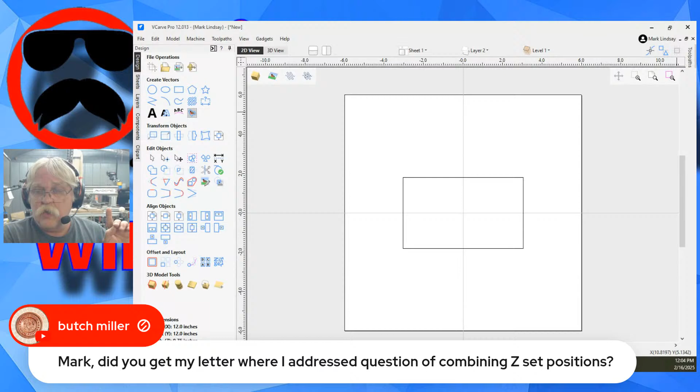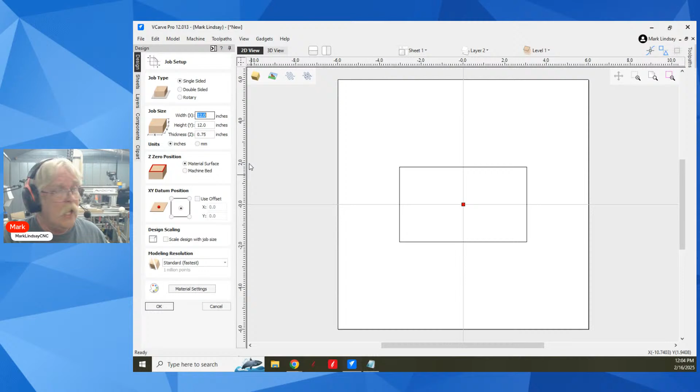Let me bring in vCarve here. It's talking about the ability to combine setting your Z0 to the material surface as well as the machine bed at the same time, and then being able to combine tool paths off to the side over here in the tool paths tab. The short answer, Butch, is no, you can't do that. Yes, I did get your email about it, but no, you can't do that. And the reason is because when you go over here into job setup, it needs to know — you can only select one. You can select material surface or machine bed, and it's going to base all of your tool paths off of that.

Now, as I indicated in my video on the subject about running material surface and machine bed in the same file, what you would have to do — for instance, if I was going to pocket this out based on the material surface, and then I wanted to do a profile toolpath based on the machine bed, I would have to create another sheet the same size as this, and then set the Z0 for that second sheet to the machine bed up here in the job setup.

It can't do both, it's one or the other. That was my determination, yet I thought Vectric might be able to do that. No, because it calculates everything from the Z0 position you set. You're not able to pick and choose where you want each tool path to run from. Now, I don't know if that's something they're even considering. I don't know if any other software like Fusion, or Rhino, or RhinoCam, or any of those other packages let you determine that for each tool path, but it's not something I've ever seen requested as far as Vectric is concerned.

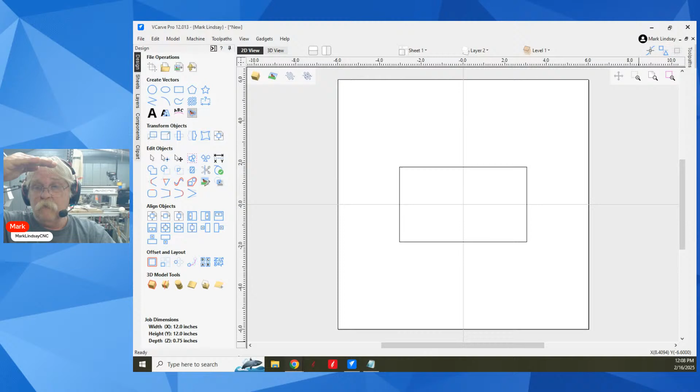Yes, it's just that Vectric can't keep track of it. And I think it's more than Vectric, because for instance, is your controller capable of handling something like that? And I got to also add, Butch's context was he likes to create one G code file and then does manual tool changes. His controller knows when to do a manual tool change, shuts off the spindle, moves to a park position, stops and waits for him to make that tool change, hits cycle start again, then it'll continue.

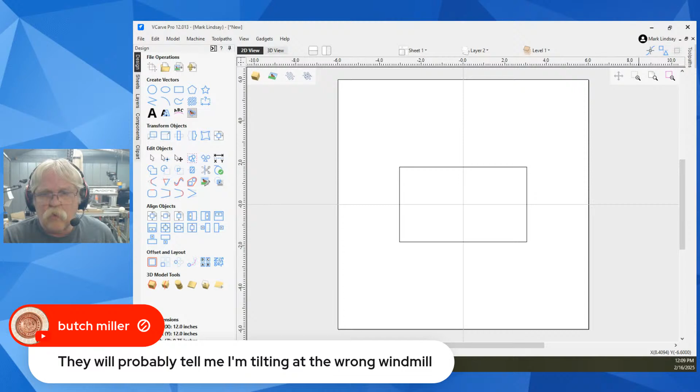Well, if you have set your XYZ in your controller, will it recognize that change from material surface down to machine bed? I think you may be introducing more problems than you'd be solving, just for the ability to avoid loading another piece of G code, setting Z0, and running it. They will probably tell me I'm tilting at the wrong windmill. You may be, because it's a question of A, can the design CAD CAM software do it, and B, can your controller do it? Will it recognize that shift, or will you have to stop and re-zero anyway?

Probably have to stop and re-zero anyway, unless you're using an automatic tool changer that already knows your machine bed position from the top of the Z height travel. But then again, I think just because you want to avoid loading a separate piece of G code and resetting Z0, I don't know. I don't know if there are other CAD CAM packages that'll let you do it, and I don't know if your controller will handle it. So there's a lot of stuff there.

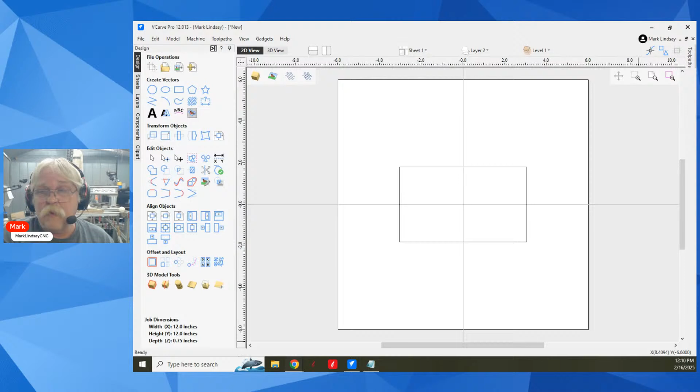Let's see, was thinking a Z0 message to remind. Yeah, that's definitely a possibility. But then you're getting into playing with the controller, which is outside the scope of anything I do, because I know some Mach 3, I know a little bit more Mach 4, but I'm not using either one of those anymore. I'm on to Centroid Acorn, which is a whole nother critter. A whole nother critter, so sorry about that.

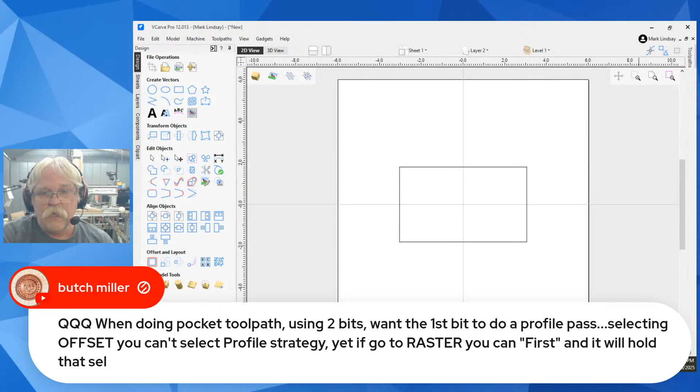Let's get into some of the others. That's another question by Butch Miller. When doing a pocket toolpath using 2 bits, I want the first bit to do a profile pass. Selecting offset, you can't select profile strategy, yet if you go to raster, you can select it first, and it will hold that selection, then switch back to offset.

Okay, so is your question about it switching back to offset? That is the default in a pocket toolpath, that is the default. If you're asking why it won't do a profile, I'll just show you over here. Got this closed vector, and we'll go over here and we'll do a pocket. And I'm going to get rid of that ball nose. 0.5 is fine for a depth.

I'm going to get rid of that ball nose, and let's go with a 1/8 inch end mill there, and we'll select it. So my roughing is going to be 1/2 inch, my finishing is going to be the 1/8 inch. And what you're selecting when you're selecting your toolpath strategy is you're selecting for the roughing bit. Now, as you can see, mine is set to raster with a profile of last. You want yours to do a profile first. Okay, that's fine.

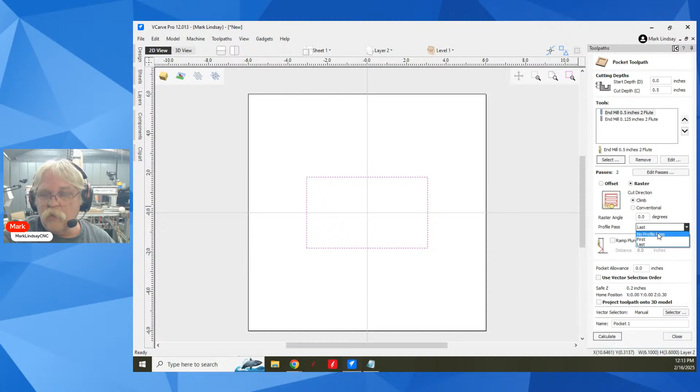Let's change that back to first. We're going to cut conventional, and we'll go ahead and calculate it. Now I'm going to uncheck both of them here.

Because I set it to raster, you can see it's not going all the way over to the vector. It's coming close, then moving over, then going back, back and forth like so. Then it will do a profile and come along and clean that up.

Now we had it set to profile first. It'll do the profile first, then go back and forth. Then we'll shut that off. Then your finishing bit will come in and actually cut up to the vector.

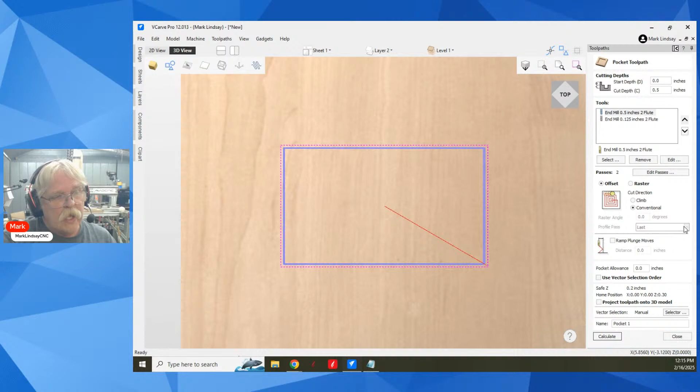Now let's go back in here and change this to offset. The reason you can't select profile pass is because an offset toolpath automatically does a profile pass. An offset toolpath is going to come out to a point somewhere towards the middle and start carving.

Then it moves out and starts carving, comes down, moves out, and just keeps carving like this. When it gets out here, it does its own profile pass.

So it won't let you decide whether you're going to do the profile first or last, because the profile is built into the offset machining strategy. So turn that one off and you can see how far out this is going to go.

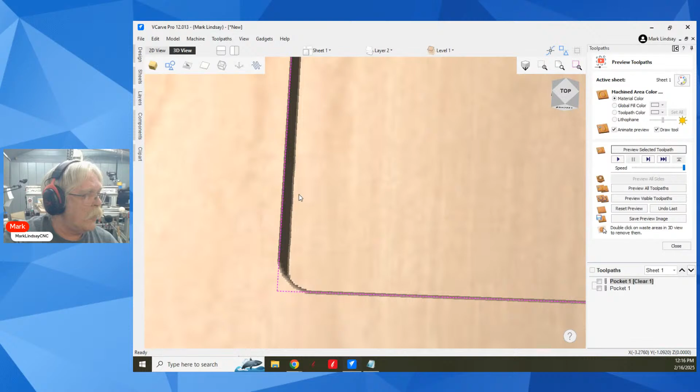Oops, I did the wrong one. Reset preview, there you go. You can see that it's going to come in and cut close to the vector, but not all the way. But with the offset, it does cut all the way up to that vector.

And then your pocket, finishing with your smaller bit, is basically just going to clean up the corners and make sure everything is nice and smooth, getting anything down in these corners that might have been left behind.

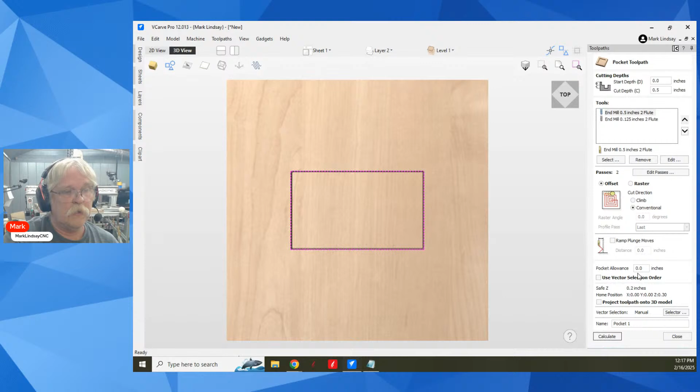So basically, when you're doing raster, it lets you decide when to do a profile pass, if any. But it doesn't let you decide that on the offset, because the profile pass is already programmed to be done with the offset toolpath.

So let's go ahead and close that and reset that preview there. Shoot back over and jump back into the 2D view. So I hope that answers that question.

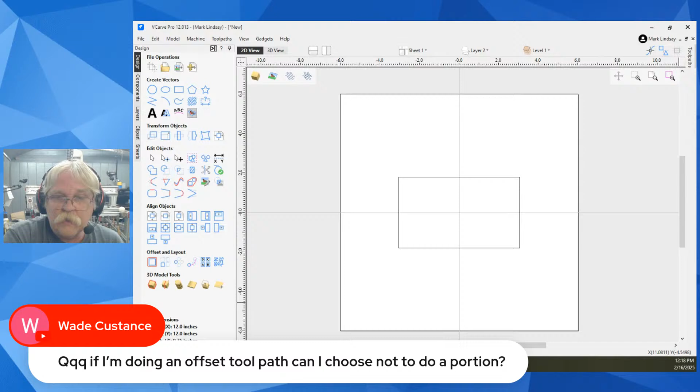Let's see, we have some other questions here. Wade Custance is asking, if I'm doing an offset toolpath, can I choose not to do a portion? I asked for clarification, saying profile, pocket, whatever. He said a profile.

If you're doing an offset on a profile toolpath, for example, we'll take this and close that. We're going to do a profile and offset this, going outside to the right, and we're going to offset this by 10 thousandths.

It is going to offset that entire toolpath. It's not going to allow you to pick and choose which part you want to offset.

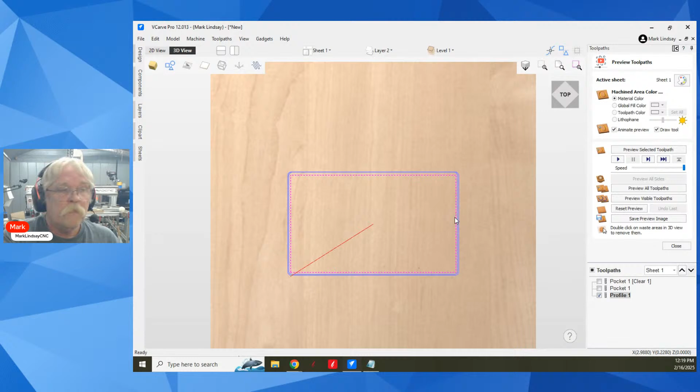The better way to handle that, let's shut that vector off and uncheck that. The better way would be over on the design side, where you would offset this vector, decide which portion you didn't want offset, then use node editing to go in and edit that offset vector.

This may include going over and starting another layer. For instance, I'm going to offset this outward 10 thousandths. Let's do that, 0.01.

Create sharp offset corners. We'll offset that, and I have offset that out 10 thousandths.

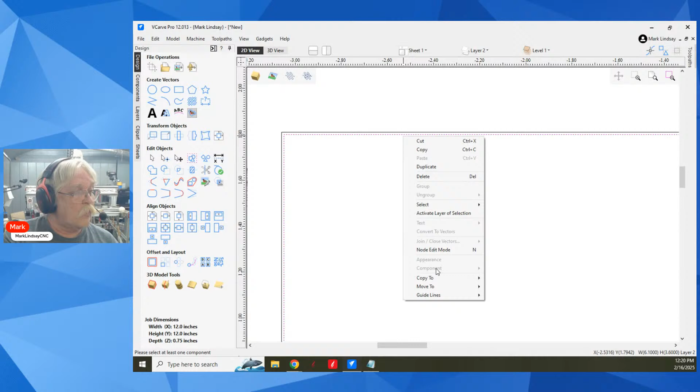We'll right click it and move it to layer 3. Now I'm going to select my original vector and move it, or copy it, to layer 3. Now I'm going to make layer 3 my active layer, shut the others off so that I have both of these here.

Now, for example, if I want to offset these 3 sides but not the bottom, what I'd need to do is come down here, go into node editing, and insert a point level with this. Well, let me just cut the vector there.

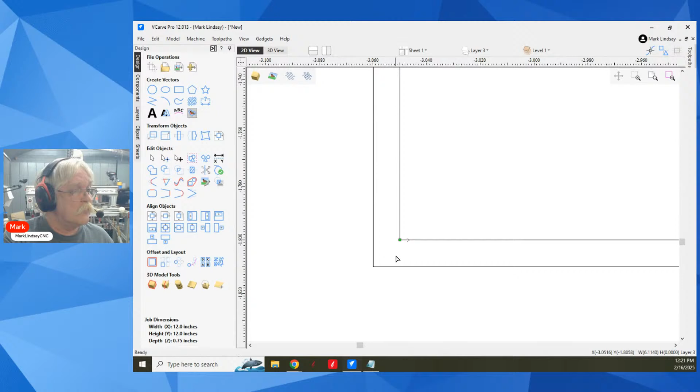Right click, cut vector. Come over here, right click, cut vector. Then I'm going to grab that point, drag it outside. Jump over here, do the same thing. Grab this point, drag it straight out.

Then I can come out of node editing, take my scissors, trim that away, trim this away, trim that away. Then I'll need to go back over here, make sure I don't have anything overhanging, trim that away.

And now what I have, let me turn layer 2 back on. Now what I have is basically an offset outwards over here, here, and here, but not there.

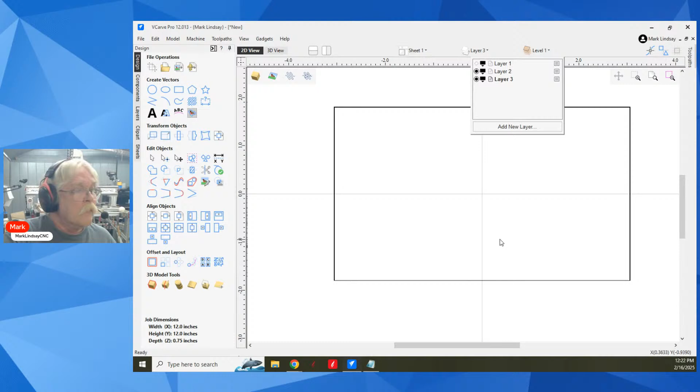This is also how you would join vectors that are giving you a problem. So basically you're doing all the offsetting out here on the CAD side rather than the CAM side. So turn off layer 2, and there we go.

Could you put a vector over the original, the part you want to offset on, and cut that, then cut the original vector? Yeah, you sure could do that, but that's not what I understood he wanted. What I understood was he only wanted to cut offset on certain portions of a vector. So okay, that works, Wade.

All right, cool, great. Okay.

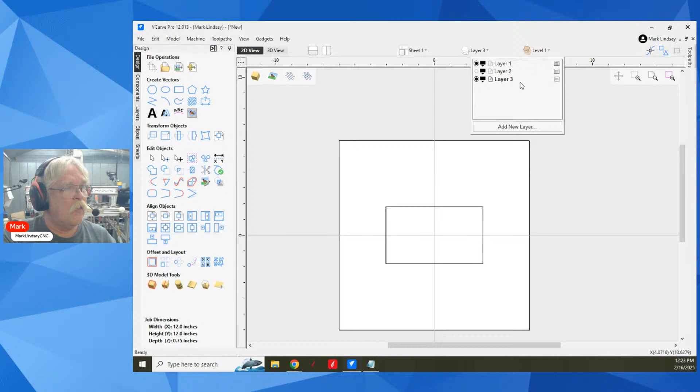Okay, we have some unfinished business that's also going to dovetail in with a question we got today. To do this, I'm going to turn on layer 1 and make it active, then turn off layer 3.

Last week, Madra 3112, or 3212 excuse me, asked about on an open vector. She wanted the bit to, say for instance, start here, make the cut on a profile, then lift up and come back over here, cut and make the profile cut, lift up and come back. She didn't want it to start here, plunge in, cut, then plunge in and cut and go back this way, and then plunge in and cut and go back that way.

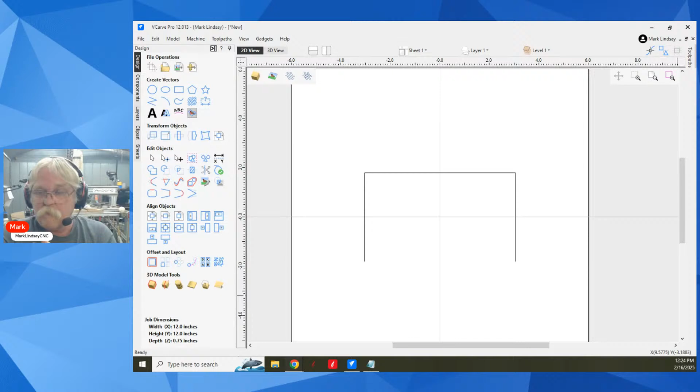So we got into it and showed it on the members only side last week. There were some folks here who wanted to know, well, show us too next week. And I said, okay, fine, I'll show it this week. What you have is a couple of things to consider.

Now, what Ellen was doing was she was select the vector, obviously come over to the toolpath side. We'll close this, and I'm going to go ahead and delete all of these. So we'll delete all visible and got rid of those toolpaths that I no longer need. Okay, so we'll come over here, we'll select this, and we're going to do a profile toolpath.

We're going to cut all the way through the material, but let's see, I'll use the 1/4 inch, and I want to make more passes just so you can see what's going on. So we'll do that. I've now got 6 passes, set passes, and click OK. So now I'm doing this in 6 passes.

Okay, now here's the trick. She was attempting to cut on the vector. And when you cut on the vector, I'm not going to do anything else out here at all. And I'll calculate that.

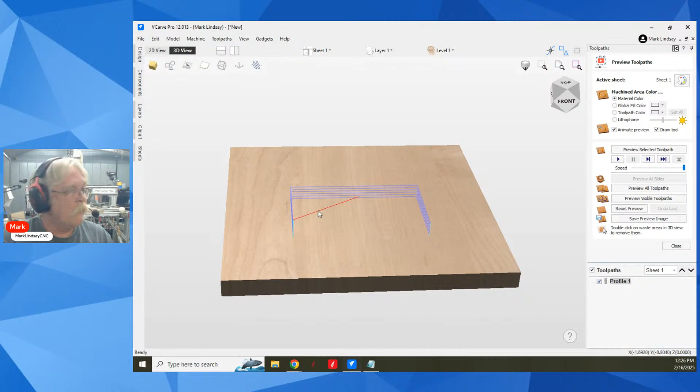When you cut on the vector, it's going to go back and forth. It's going to cut around like this, then plunge down and come back around like this. Okay, now if you look, what we have here, it's going to come over from our XY0, and light blue is plunges, green is retracts.

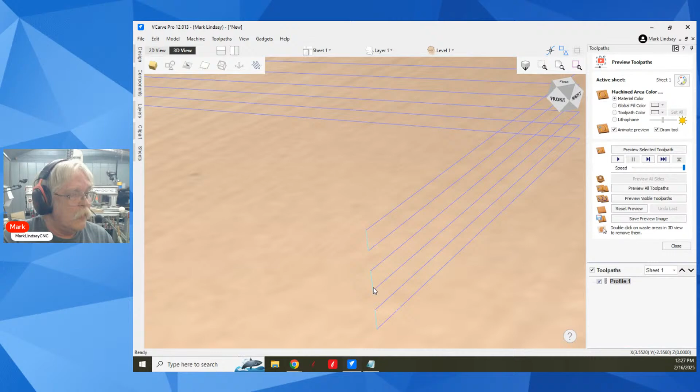It's going to plunge down, make the first cut, come around over here, zoom out, zoom back in, and then there's our light blue plunges. It's going to plunge down to the next level and go back around that way. And then do the same thing over there. Plunge down, then come back around this way to here. Then plunge down and do that. That's if you're calculating that profile toolpath to cut on the vector.

Now, if I go back over here and I say cut to the outside of the vector, and I come down and I calculate, it's going to do the exact same thing.

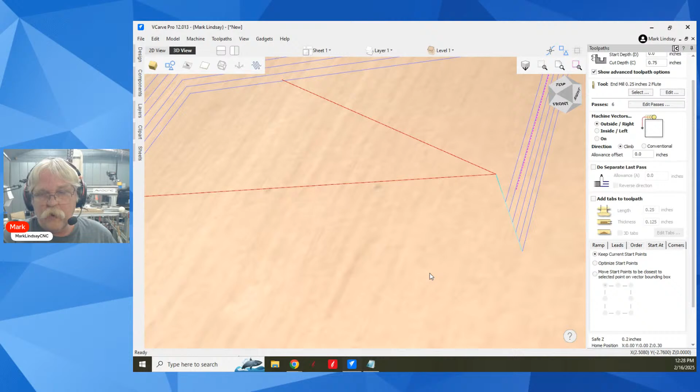Now, what I need to do is go over to Start At and make sure I have the radio knob selected in Keep Current Start Points. Usually it's set to optimize start points. We don't want to optimize the start points, we want keep current start points. What that's going to do is make it use the vector start point, and that's where the plunges are going to be. Now there's another aspect of this that I'll show you in just a second.

Close this, we'll go back to the top here. I'll go back to my preview, and I'm going to slow it way down so you can see what the bit is actually doing. We'll zoom in, now we'll preview. We can see it plunged in over here, and it's going to lift up and come back and plunge over here, then lift up, come back, plunge over here. So it's doing what we wanted.

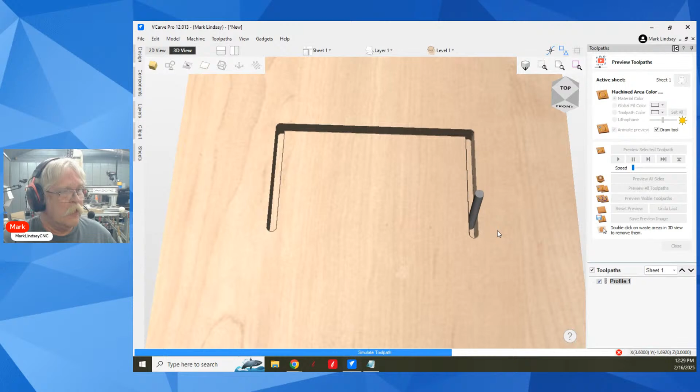However, look at the direction that it's going. It's starting over here. Let me go ahead and stop this. If I come back over to my 2D view, there's my start point, but it's starting over here. Why is that? And we can confirm that it's the start point - the vector selected, we'll go into node editing, and there's my green start point, but it's starting over here and going this way. Why is that?

Well, if we go back in, we're machining the vectors from the outside, or right, of the vector.

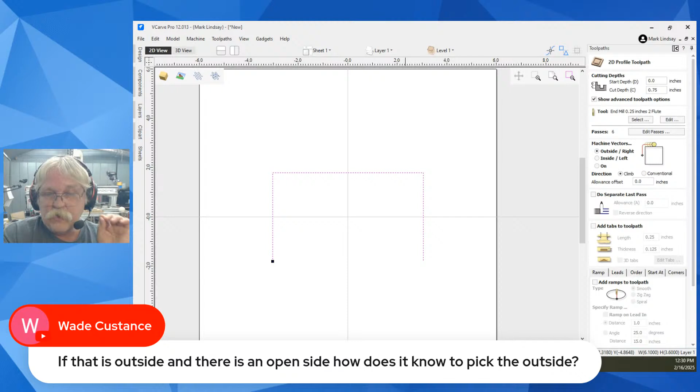Now, the way it was explained to me, the easiest way I've seen it explained when you're wondering about this stuff - this also dovetails in with doing a pocket with an offset. And Wade, that's exactly what I'm getting to right now. If that is outside and there's an open side, how does it know to pick the outside?

It doesn't. That's why you have to pay attention here. Outside, right. Here's the way it was explained to me: imagine standing on that start point.

We go back into node editing for a second. Oops, I got to close this so I can go into node editing. Close. If I select the vector, we go into node editing. There's my start point - look at the direction that arrow is pointing right there, it's going this way, okay? Come out of node editing, go back into the toolpath.

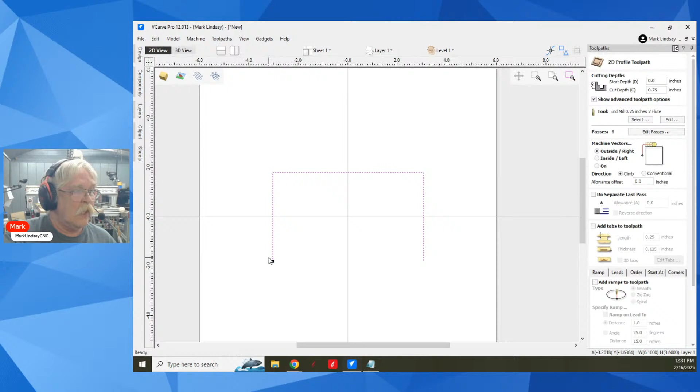Outside, right - so imagine standing on that start point, it's going to cut to the right of the vector. Okay? If I go inside left, it's going to cut to this side of that vector. It's based on the direction of the start.

However, just to complicate stuff, it also looks at direction. This is set for climb cutting. This is why this is the start point, but it started over here. So if I change this over to conventional and I calculate, now it's plunging over here. Let me reset my preview, zoom in, way down on my speed. Now it plunges in over here at the start point where we wanted it to go.

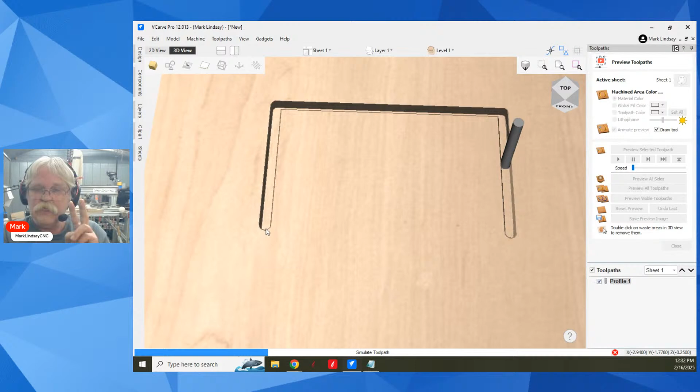So there's two things to pay attention to right there - or three things actually. Where your start point is, your machining strategy, and your machining direction, climb or conventional. Okay? So that's three things to pay attention to.

Now, just to complicate matters a little bit further, what Ellen was wanting was she was wanting to cut on the vector. Well, if you cut on the vector, again, it's going to plunge down here, go around for the first pass, plunge down over here, then come back around for the next pass. The software won't allow you to do that. It's not going to lift up and come back over and plunge down when you're carving on the vector.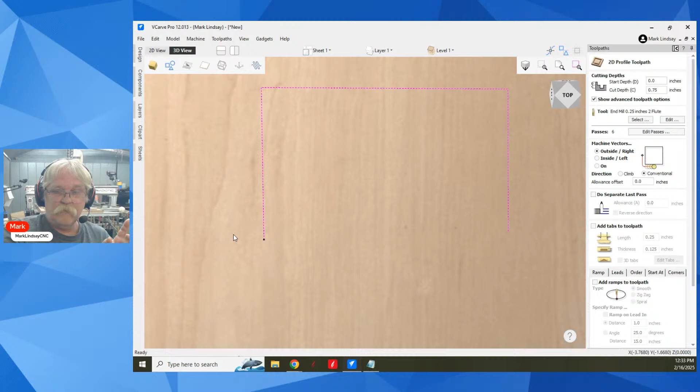So now what you have to do is you have to decide, am I going to cut this outside to the right, or am I going to cut this inside to the left? We're going to cut outside to the right, so I want the bit to cut inside the vector.

So what I'm going to have to do now is go back over to the CAM side, or CAD side, and I'm going to have to offset this out. So I'm going to offset it inwards left - this is confusing. I'm going to offset it inwards to the left. I want this out here.

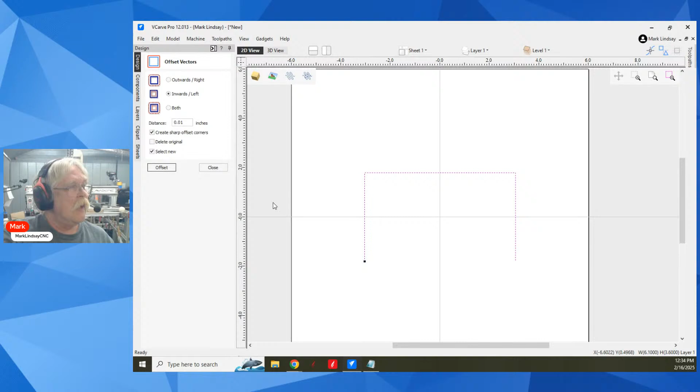Again, standing on the point, looking in the direction the vector was drawn, I want it to go out to the left. And I'm going to offset it out the radius of the bit that I'm using to cut. So if I'm using a 1/4 inch end mill, the radius of that 1/4 inch diameter is 1/8 of an inch, 0.125. Create sharp corners, select new, offset. So there is my offset vector. Okay.

Now I'm going to select that. I'm going to select outside right. Again, confusing as heck. That's going to come over and put the center of that bit right along this vector.

Okay, then make sure I've got my direction correct. Make sure I've got keep current start points. Then I'll calculate that toolpath. Go straight down from the top.

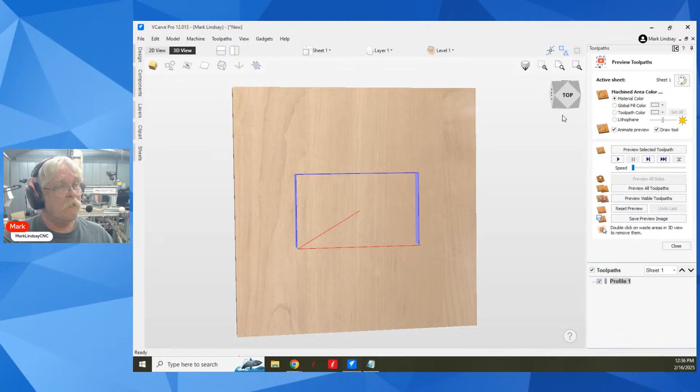Straight down from the top. And I'll preview it. Now it's going to cut in the right direction. It's going to lift and then plunge over here. Let me speed it up to get through these 6 passes.

It's confusing, but it works. Now I really don't know why it is the way it is. I really don't know why if you select on the vector, it won't lift up, come over, and plunge. I don't know why that is. I'll reach out to a few folks and see if they can give me an explanation as to why that happens. So,

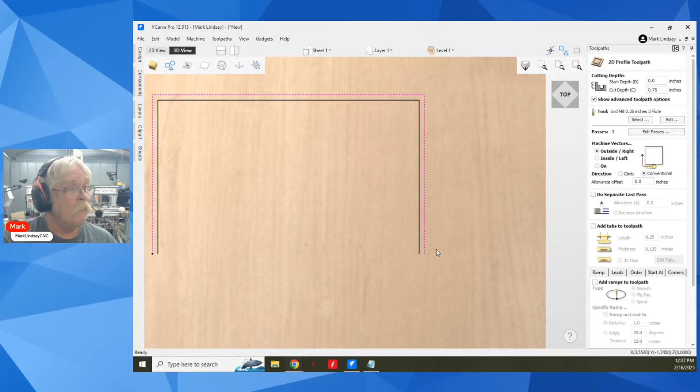Wade says, so you change your start point if needed to get the direction of cut you want. That's the first place to start. Yes, you make sure your start point is where you want that to start. Then you need to make sure you're machining to the proper side. Then you need to keep current start points. Okay.

So, but isn't Vectric going to complain that you have an open vector? No, because a profile can cut open vectors. The only toolpaths that need closed vectors are pockets, drilling, and V-carving. Those are the only toolpaths that absolutely need closed vectors.

Profiles don't need closed vectors. Photo V-carve doesn't need closed vectors. Sketch carve doesn't need closed vectors. Wait, I take that back, V inlay does need closed vectors. Fluting doesn't need closed vectors. Yeah, I don't think the rest. The 3D needs closed vectors if you're machining to a vector. So,

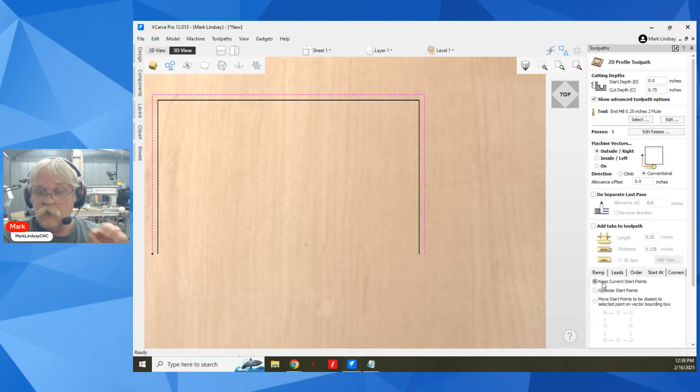Pete says, so the optimized start point selection would not be a factor in this exercise. It's not desirable in this exercise because you want it to use that start point, you want it to keep using that start point. So that's not desirable. The optimized start points is used, if you've got several vectors out here, to shorten the amount of time the bit's going to be up out of the material so that it's cutting rather than making rapid moves.

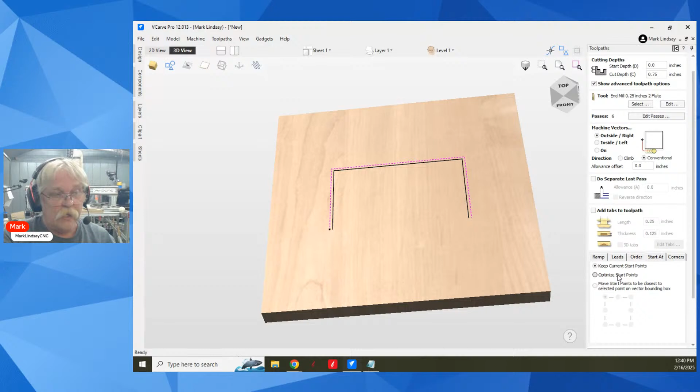Well, in this situation, you want it to cut a certain direction and you don't mind those extra rapid moves, because in this situation, the bit is taking 6 passes. It's going to make 6 rapid moves back over here to cut in this direction. Okay. So the optimize will keep it from doing that. It'll try to keep the bit down cutting in the material as long as it possibly can, or as much as it possibly can, just to optimize it so you're not spending a lot of time.

So I like to control where my bit starts, so usually I set my start point. Yeah, I do too, I do too. For instance, if I'm using a XY0 position over here on the bottom left corner, I will try to make my start points over close to the bottom left corner, because to me it doesn't make much sense to set to the middle and then have it come out here, or set over here and have it come over and start over there. If I'm going to do that, why not set my XY0 over here?

Because remember, you don't have to set your XY0 to the bottom left corner. You can set it to any of the four corners or the center. So

I was just getting to you, Ed. I was just getting to you.

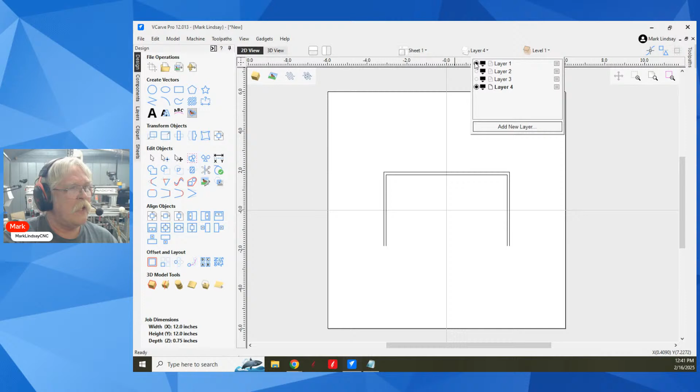Okay, let me do a little bit of reorganizing here. We'll get back over here, zoom out. Excuse me. And I'm going to start, I'll add a new layer here, call it layer 4, that's fine. I'm going to make it active. I'm going to turn off layer 1.

Now Ed was asking, when surfacing using a 1.5-inch bit at 40% using a pocket raster, I can set a depth of 1/4 of an inch and take multiple shallow passes using my Shapeoko 4 with a spindle. When I cut in one direction and it goes back in the opposite direction, I get a ridge. When I set up multiple passes with open vectors cutting in one direction, let's say right to left, and lift up and cut another pass from right to left again, I get a smoother finish. My question is, how can I set my depth to 0.25 inches, taking shallow passes using open vector format?

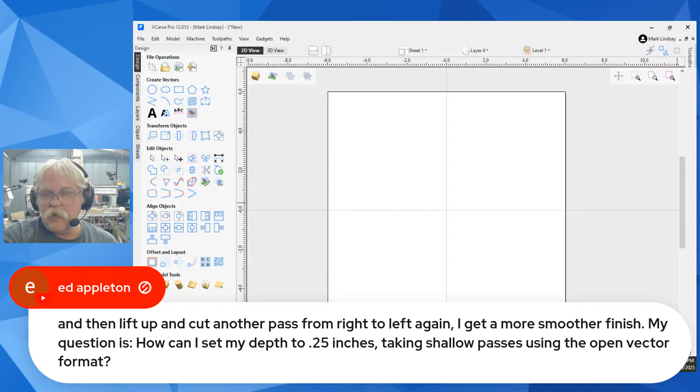That dovetails in perfectly with what I'm showing right now. Okay.

Basically, what you're looking at is, you set a 1.5-inch bit with 40% step over, so that would be 0.6, right? So what I'm going to do is set up a pocket toolpath for this. Now, when you're doing this the way you want to do it, you wouldn't use a pocket. You would use profiles.

So what I want to do, I want my bit, and I'm going to go right to left, as you stated. My bit is 2 inches in diameter, yours is 1.5 inches, I'll just do it for yours. We want all of our X moves to be off of the material, and we know that. So what we'll do is come out here by about 2 inches. But for right this moment, I'm going to just go ahead and make a vector that's the same length as the material.

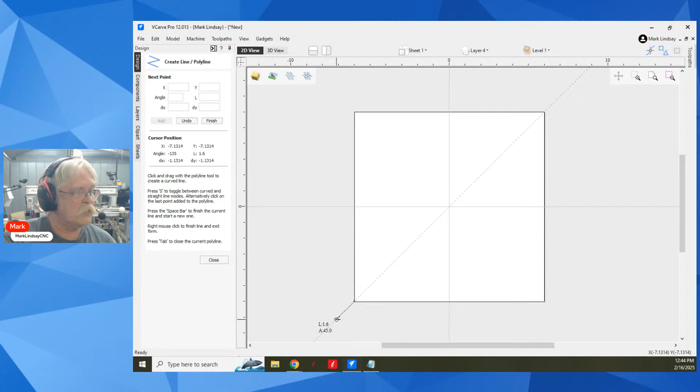Now, because you're going from, you want it to cut from here to there, you still want the bit to come off so you don't end up with a round edge here and you don't have plunge moves happening on your material. So I'm going to take this and move it out another 2 inches. Boom. Well, I moved it, I didn't extend it. That's okay, I'm just looking at my scale up above.

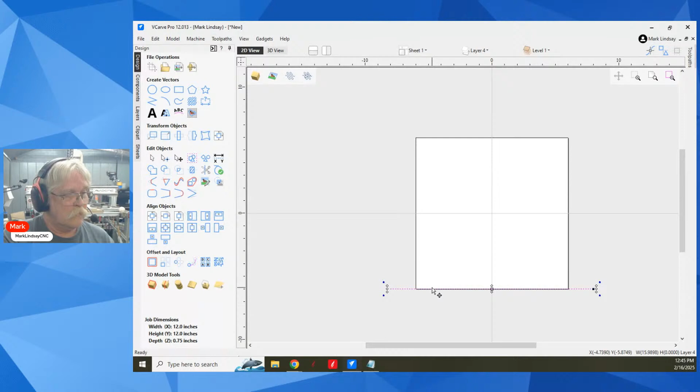What I've done is I've just stretched this out. So I'm looking at my scale up above here. I'm at 6 and I just drug it out until it's equal with 8.

Now I'll select that, and I want to copy these up this direction. So I'll do an array copy, make a linear array. I want one column in X, and boom, I want rows in Y.

0.6, I think we want 10, should get me to 6 inches roughly. Let's look at 12 and see what that does. They said there'd be no math.

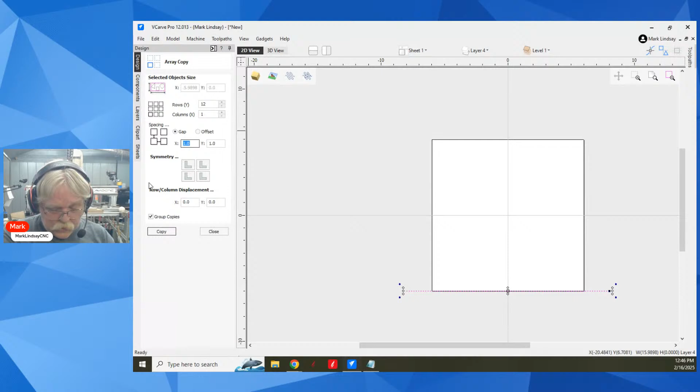I want a gap in X. I don't want any gap. I want a gap of 0.6 in Y. Okay, don't want to group them just yet. Let's copy, let's see what we get.

That's not enough, control Z. Let's go for 20. Whoops, go for 20. Copy. Let's go for 21, control Z. Because what I want... there we go.

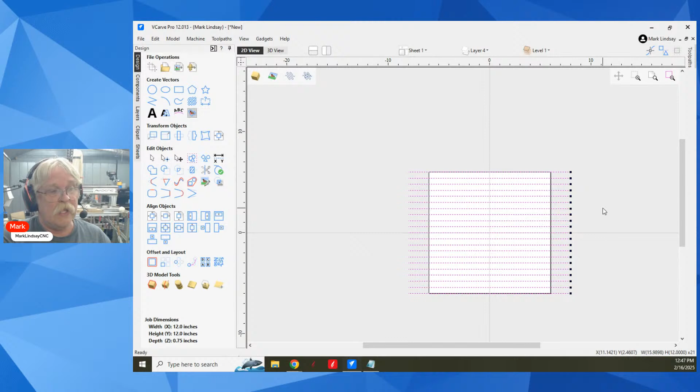What I want is a vector right here on this top edge, and a vector down here at this bottom edge. So now I have all of these open vectors. Notice my start points are all on the right. I can verify this by tapping N to go into node editing. All of my vectors start on this edge.

Come out of node editing, zip over here, and we're not going to do a pocket toolpath, we're going to do a profile toolpath. Now you want to come down a quarter of an inch, 0.25, but you want to make shallow passes.

Now, just because it's me and I don't have a 1.5 inch surfacing bit in my tool catalog here, my tool database, I'll use my 2-inch surfacing bit. Boom, and select.

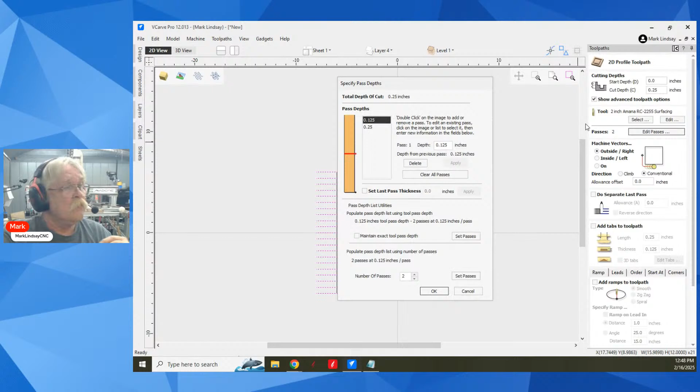And I'm going to come down here and edit the passes. Now you said you wanted it to take off shallow passes, but you didn't say how shallow, how much. But what we can do is come down here and set the number of passes. We're going to be taking a quarter inch of material off. I'm just going to click the up arrow here. We're going to be taking off about 62 thousandths, 0.0625, so a 1/16 of an inch per pass.

If that's okay, we'll click set passes. If not, we'll do a little bit more. 6 passes, we'll click on set passes. Then we'll click OK. Now it's going to take 6 passes.

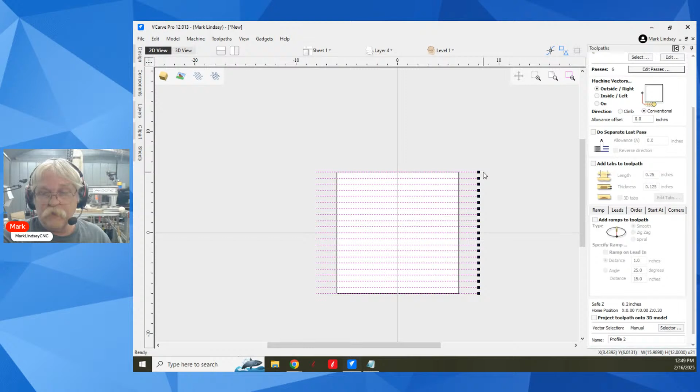I'm not going to do a separate last pass. I'm not going to add tabs. I'm not going to ramp or add any leads or anything. All of the plunges will take place over here off of the material, so when it moves and gets onto the material, it's already at the proper depth and it's already up to speed. So now we'll click calculate.

Yes, they will cut as individual contours, not as a single contour. Continue creating the tool path. Yes, okay.

Now that's kind of busy, but that's going to give you the finish that you want. Now, why is that offset up this direction? Did I have an offset in there?

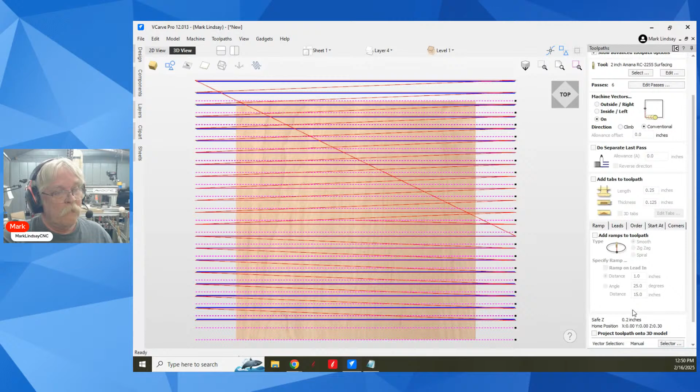Oh, that's because I want it on the vector. That's what I forgot, I'm sorry. I want it to cut to machine on the vector. So, and boom, there we go.

Now that's giving me what I want. And that we're on profile 2. I'm going to slow down the bit again so we can see what it's going to do. And we'll preview. And it's going to do that, because again, we're going on the vector. So it's going to cut your 1/4 of an inch, then move over to the next side.

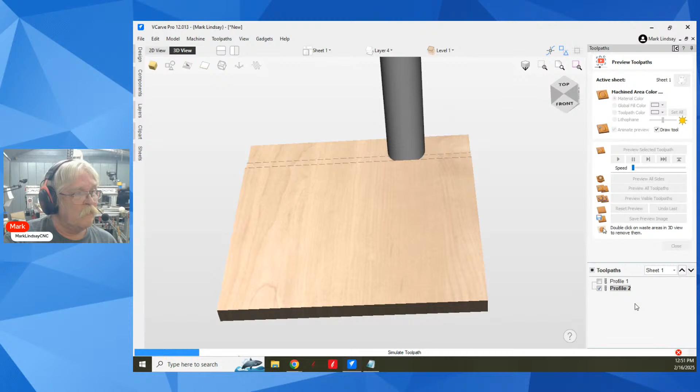You may not want it to do it this way. But no, that's not what you want it to do because it's carving on the vector. Yeesh, man, we get back into that situation. Stop. Reset preview. How should I do this?

There's a couple ways I can do this. Outside right, that's going to shift everything over, though. No, that should do it, okay. Yeah, okay. Let's see how this works.

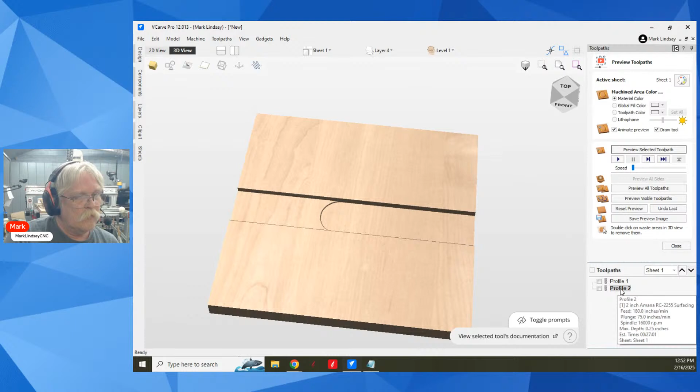Now why is it going for the center? This makes no sense. Oh, wait a minute. Wait a minute, stop. Reset, let's go back over here. Start at, keep current start points. No, that's right.

Let me try optimize and see what this does. See, Laney Shaughnessy does his this way, and I can't remember how he does it. That's not it. Current start points.

Yeah, they must be joined to do these as one contour. No, I don't want to do it that way. I'm going to have to refer you to Laney Shaughnessy, simply because he does his this way, where he makes a bunch of different vectors.

He might just move these around. Andy, I haven't gotten into that yet. Can you just edit the tool and set the pass depth?

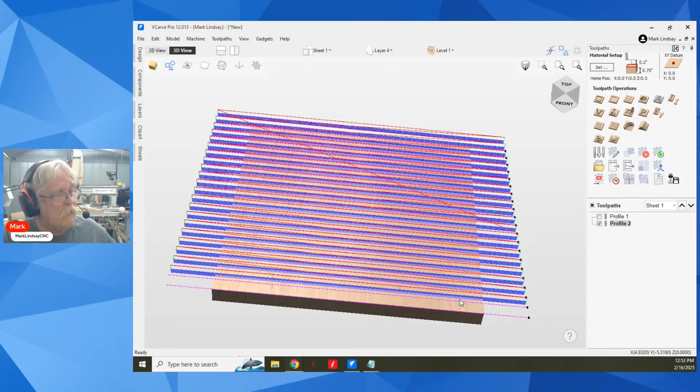Pete, yes, you certainly can. You could get in and set the pass depth if you wanted, but if you're only doing it for one tool path, why? It doesn't make sense to go back in and redo pass depths. It's going to give you the same result.

God, there's a step I'm missing that I don't remember. Laney Shaughnessy over at Spindle TV does his surfacing this way. I don't necessarily agree with it, personally.

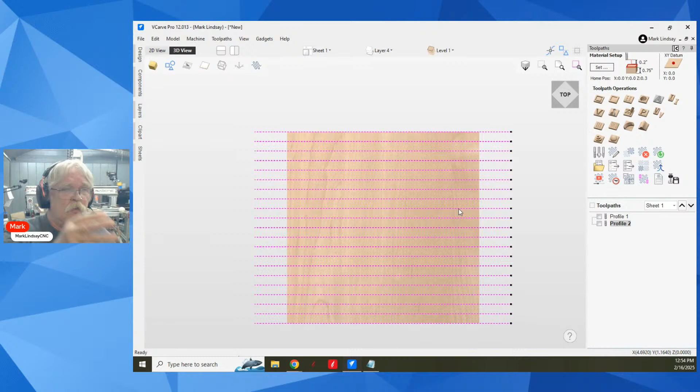Laney's claim is when he does it with a pocket like I do, he gets burning on his material. And my attitude is that's the problem. The burning doesn't have anything to do with the pocket. If you're getting burning, either your spindle RPM is too high, your feed rate is too low, or a combination of the two.

And I think you may be right, you may have to select the vectors in the order you want them to cut. I think you may be right. So let's do this. 7, 8, 9, 11. But then you have 20 selections to do, 21 selections to do, but that's okay, not a big deal.

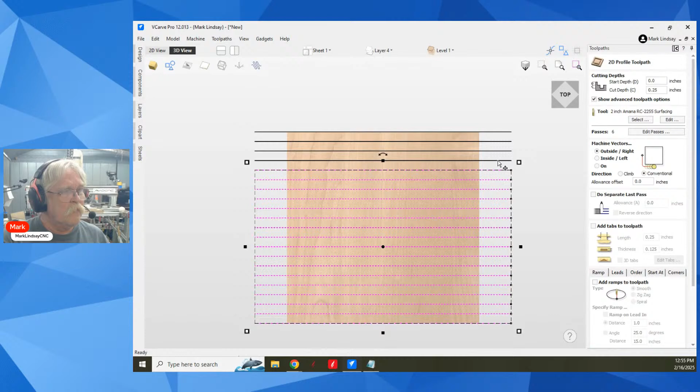Not a big deal. That'll take care of where it starts and your vector selection order. Let's try that, see what we get going.

Further info, just edit the tool for that specific tool path. Yeah, I don't like to do that. You can get in here, click edit. I wouldn't do it in the select button, but you can get over here and change your pass depth to, let's say it is, well right now we've got 1/8 of an inch.

Let me cancel this and let me go back into edit passes. And we're going to, where is reset? We'll take it back down to, I think it was going to do it in 2. Set passes. Okay, now if I, with this bit selected, if I go in and edit and change my pass depth to 0.03125, for example, I put that second decimal place there.

All right, click OK. Look at what that did to my passes, it's going to take it all off in one pass. Cancel, let's go back in here. Oh, it's because I didn't add a 0. Duh, hello, there we go.

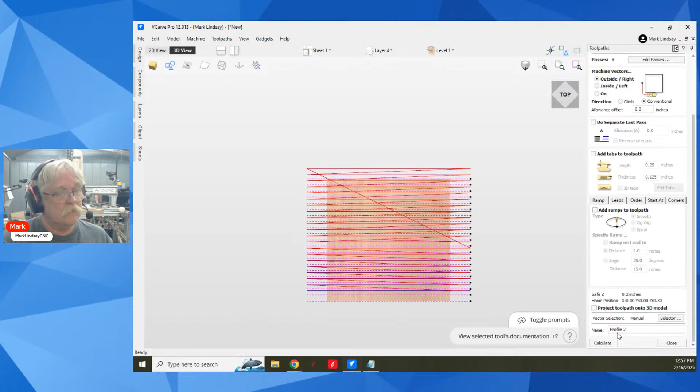Now it's going to take 8 passes. And now let's see, did that have any change? But I still think what it's going to do is do one stripe and then move on to the next stripe. So we'll preview it, and sure enough, that didn't matter. It is doing them one at a time.

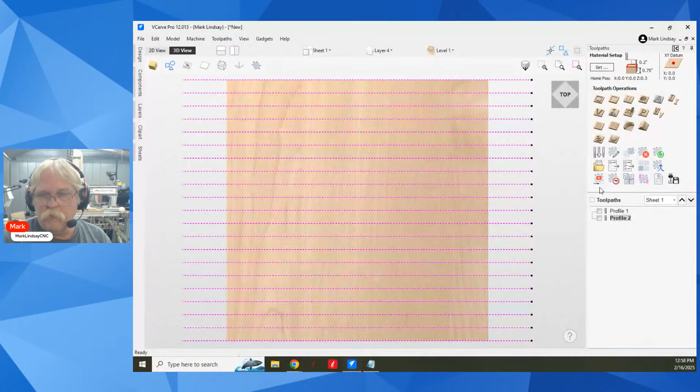Personally, I don't use that. I don't surface using this method. I do a pocket. And, you know, that's just my choice.

Martin says, try setting XY zero to bottom left. Yeah, I could do that. Let's see, that might change it. You may be right, okay, recalculate, okay.

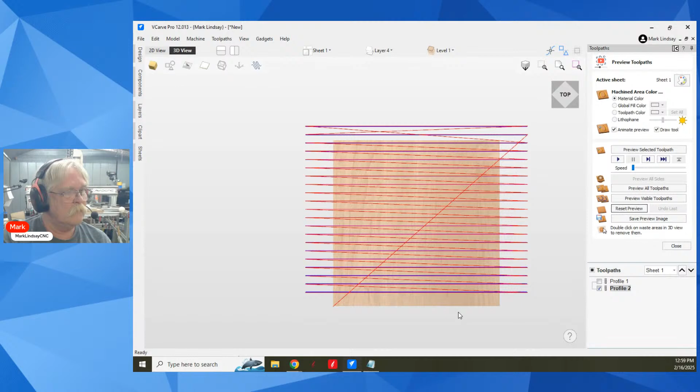Okay, turn that one off. And go back into preview, reset. Let's see what happens.

Yeah, but it's still doing - that did work, Martin, you're right, but it's still doing one all the way down to the depth and then moving over to the next. So that was also an issue for me anyway. So let's stop that, reset the preview. I wanted it to remove, say, a 30 thousandths pass, and then move it again, then have it come and do the whole thing again.

So I will refer you to Laney Shaughnessy. Give me about maybe 15 minutes after I'm done with this, and after we're done live here, I will go find that video and post a link to it down in the description. Let's see, Laney surfacing video. I'll write myself a note right now.

All right, Laney Shaughnessy, he does mainly live streams. In fact, he almost exclusively live streams on his channel, again called Spindle TV. And he's a dynamite teacher, he's a heck of a good guy, a real good guy, and he knows what he's talking about. So, does he do lots of separate tool paths, then output them all at once? No, he does not. I can't remember how he does it because I don't use that method, so I really don't remember.

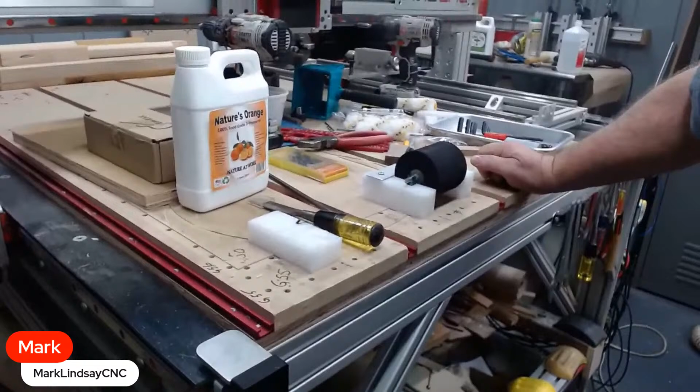Basically, my spoil board is not the size of my machine table, and I can show you that over here by switching over to this camera. You can see that I have a piece of T-track to the outside of my spoil board over here. My machine will actually cut over to about right here - okay, about, well you couldn't see that, camera's way off, there we go - my machine will actually cut to about right there, and about 1.5 inches this side of this edge of my spoil board.

And I did that for a couple of reasons. Number one, I don't need that area. Number two, this machine's cutting capacity is actually 49 inches in X and 49 inches in Y. I don't ever use that. With a rotary axis over there, I don't have 49 inches of X anyway, I have 30 something. Not only that, the way your machine calculates its X width is based on the center of your spindle. You can't see what I'm pointing at.

Yes, you can. So, for instance, when I've got my 2-inch surfacing bit here, the center of that spindle gets over here to the edge of my spoil board. In my case, I'm about 1 inch off of the spoil board over here. So all I need to do is I don't even need to bring this over to the limit of my machine, because it does me no good to have my surfacing bit way over here, since it's off of the spoil board anyway. If I can get the center of my spindle close enough to where it's cutting off the edge of the spoil board, I'm good enough. And that's nowhere near the limit of my machine.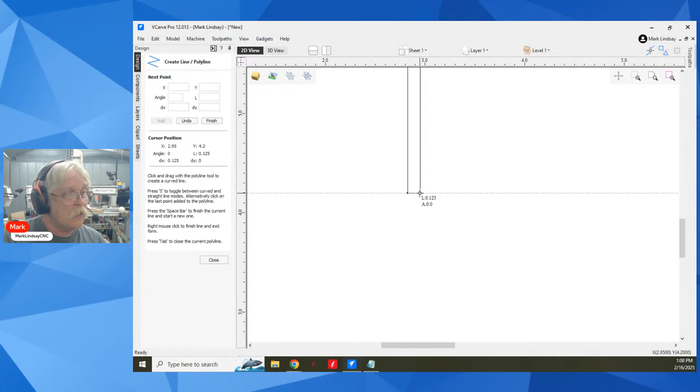If I want to join these to make one closed vector, I've got a couple of ways I can do it. One, I could come over here to draw a line, click, click, space bar, close, then select, come right over here, join open vectors. Right now I have 3 open vectors selected. When I join them, I'll have 1 open vector. Join. I still have this opening here.

Now that's one way of doing it. Here's another way. Select these 2 open vectors. This is 1 open vector, but it's still wide open. I can come over here, join, close with a straight line. So I click on that, and it did all that for me. So now, if I select this, go into join, I have 1 closed vector.

Okay? If you get into a situation, let me try something else here, where we've got this that runs there and runs down here, close. Then you have—let's see, how would I do this—start here, and then come down there, close. When you have something like this, if you want to join this one to this one, you can just use your scissors to trim.

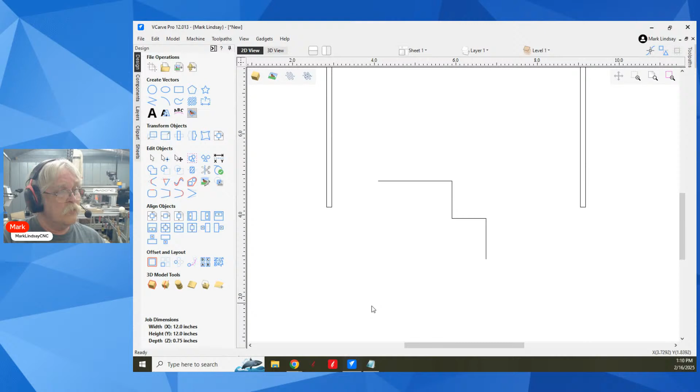And so long as you have a check mark here, you close. This is now one open vector. Now, how do you close this? Same way, close with a straight line. And there you go.

Okay, so now click on that, go to join. We have one closed vector. Again, this is just a few different ways of doing this.

But if you have a situation, let me play with this one here. I'll go into node editing, and right in the middle of this span, I'm going to right click and insert a point. Then I'm going to come back and cut that vector. Okay, so now I'll select this and grab that start point and drag it over here. Now I have a start point here and there's my end point. But you see how long that overlap is.

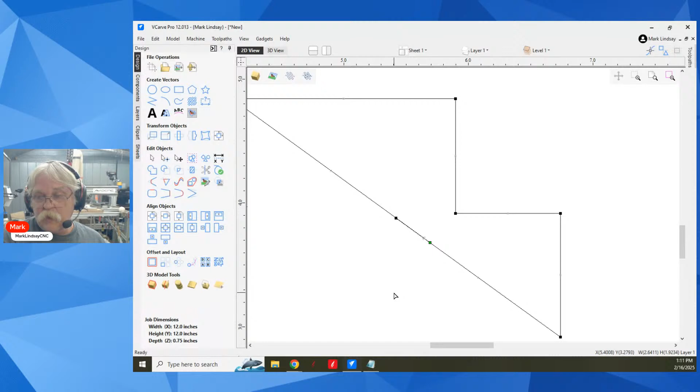Okay, so now I come back and it just looks like a vector to me. Click, select it, go over here, try to join it. I've got one open vector. After joining, I've still got an open vector.

What's going on is our tolerance. This tolerance is 0.0004, so not even half a thou, is way smaller than the difference between this start point and that end point. The start point is way over here, the end point is way over here, and that's much further away than this is. So about the only thing you can do if you don't know where the start and end points are

If you don't know where that end point is, about all you can do is start removing zeros. So I put my cursor right in front of that first zero next to the 4. I hit backspace. Nothing has changed. Backspace. Nothing has changed. Backspace. Now I've got closed. So that tells me the start point and the end point are within that 0.4 of an inch.

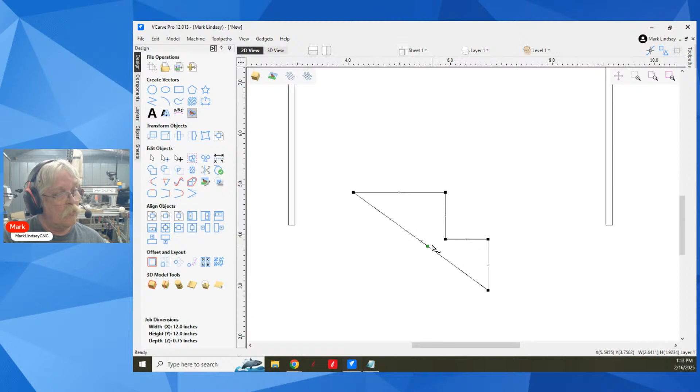Now if I control Z and select it, we can see there's my start point and there's my end point. That's much further than 0.0004. In fact, let's measure and see. Let's measure. Go right there. 0.3407. So that 0.4 puts that difference within tolerance.

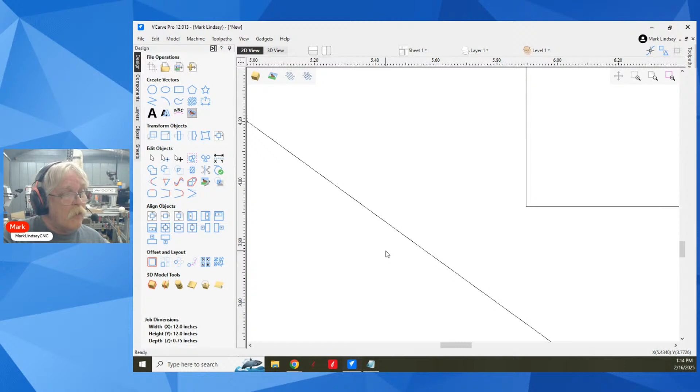So control Y to redo that. And now my vector is joined. Those are some of the ways you can close open vectors. There are a bunch of different ways.

One of the advantages to version 12 of the software is out here in the 2D view, it now shows you this green point here on an open vector, and that lets you know where that start point is. The problem is it doesn't show you where the end point is. So if you have a real complex vector, like something within a flower, and you've got vectors all over the place, you can find the start point, but there's no real way of knowing where that end point is unless you go into node editing.

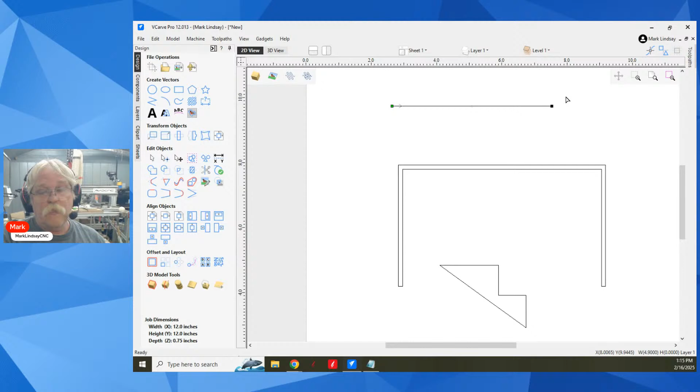You can go into node editing by either coming over here and clicking node editing mode, or just by tapping the letter N on your keyboard, in which case it'll show you that green start point, then it'll show you the end point. It will show you every point in between also. So like if I do this, it's showing me there's my start point, and it's showing me which direction this was drawn in. Here's this point, this point, this point, this point, this point. On a closed vector, the start point and the end point are the same point.

So, that's a little bit of that.

Now let's see, Ellen had another question. I hope that helps you, Tony. I hope that helps you a little bit. Again, I will go in and find some of the better of my videos. I see Steve has already posted one over here in the chat, thank you very much, Steve. I've got several because several things were updated, but they all pretty much follow the same methodology. But there are different improvements. Some things work better than others.

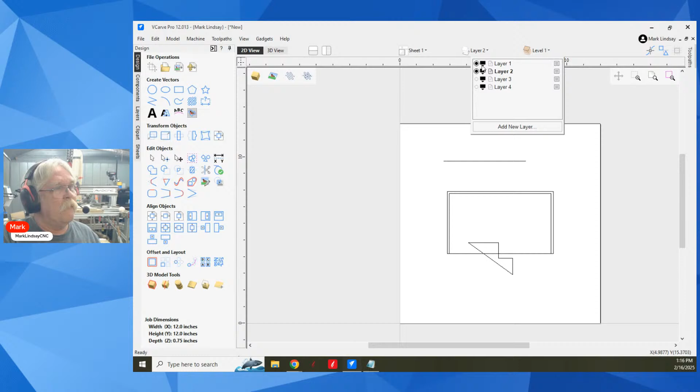To go ahead and wrap up, well, we've got 2 more questions. Ellen has been waiting patiently for me to talk about the pocket toolpath with an offset. Her question was, when you're offsetting a pocket, is it a positive offset to make it cut further in, or is that a negative offset? And does a negative offset make it cut outside of the vector, or is that a positive offset?

Well, let's get into it and let's figure it out. Then I'll show you also, Ellen, a trick that'll help you see for yourself. Well, it's not really a trick, it's a tool that'll help you see for yourself, okay? Let's get rid of, let's delete both of these. Let's just delete all, because I'm going to do a pocket toolpath with this. We'll go in here with a pocket, and I'm going to remove that and just go with the 1/2" end mill just for this. Okay.

Now the pocket allowance, what she's talking about is the pocket allowance right here. Let's say we do a pocket allowance of 0.1, which is huge. If I was going to use a pocket allowance of 0.1, I would just redraw the vector personally, just me. All right, so let's calculate it. And this is a positive pocket allowance. Let's calculate it. Now the trick, Ellen, or the tool, is this.

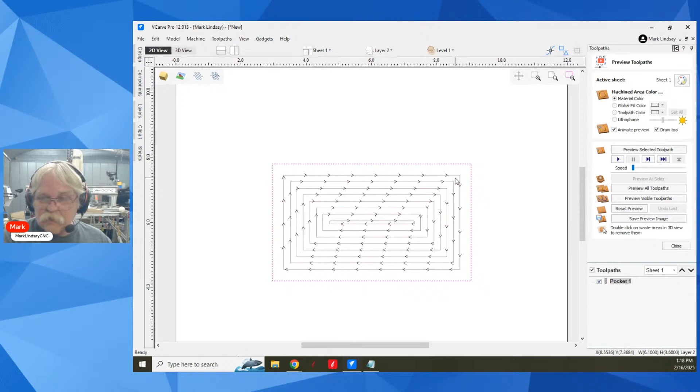Right now, if we come over here to the 2D view, not the 3D view, we want to get into the 2D view. We can look and see where that's going to carve, but that doesn't really help us. Come up over here to this tool right here: toggle the toolpath 2D drawing style. And this is why this is in the 2D view. Click on that, and this gives us a solid view of what is going to get machined out by this toolpath. All we do is make sure we have a check mark over here, and we're looking at a solid view. That's where that toolpath is going to carve. So now we can see a positive pocket allowance makes the toolpath smaller.

Let's go back in here and just add a negative toolpath. We calculate, back over to the 2D view, it makes the pocket wider.

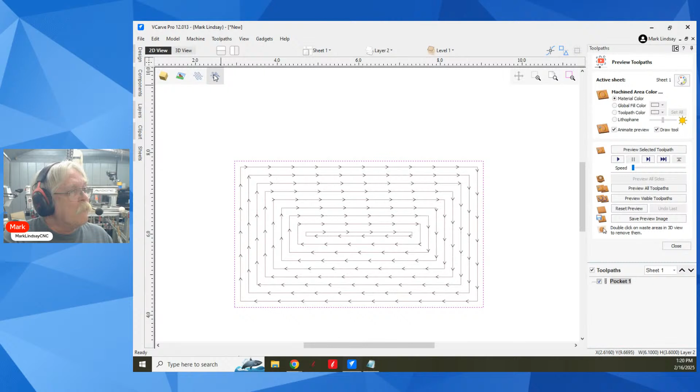Okay, you said you never used the wireframe, never had a need until now. This is solid view, this is wireframe view - this is the default, that's normally what you see. You see the direction, which way, these arrows show which way the bit is going to move. I toggle over to solid view, and that tells you what is going to be cut out by that bit.

If I go back and remove any pocket allowance, 0.0, calculate, go into 2D view, it's going to put it right inside that vector. So negative will make it go wider, positive will make it go smaller.

Why? Again, we've got the vector selected, go into node editing. There's the start point, there's the arrow. To the right, outside right - see? Or did I have that backwards? Outside right, inside left, I believe. So,

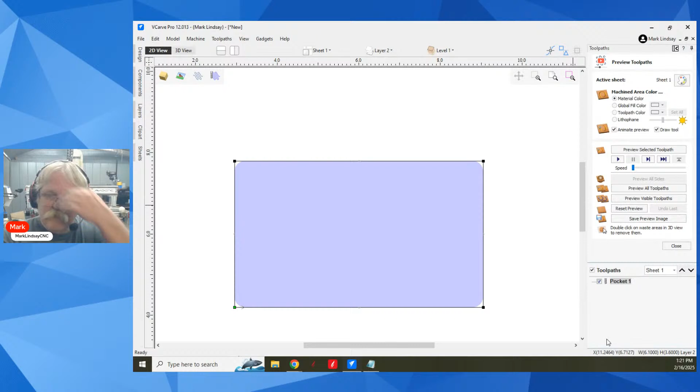Is the rule minus outside the vector and positive inside the vector? Yes. Minus is larger, positive is smaller. It's counterintuitive, I know. But this is why I use this, because I can't keep that straight either.

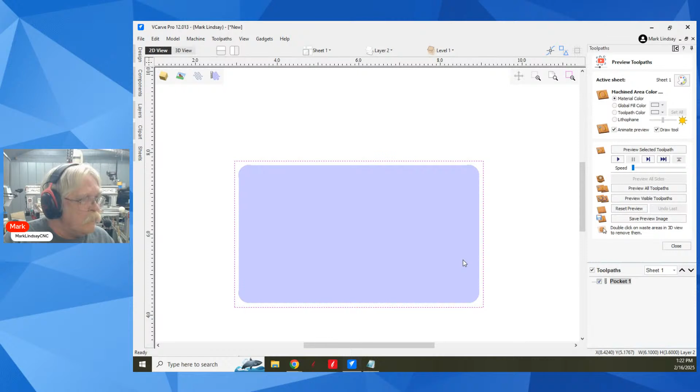I really can't remember, so I'll try one. I'll go 0.1 and calculate, go to the 2D view. Oops, I wanted to go the other direction. Okay, pocket - just add a negative, recalculate. There we go.

I also use that when I have vectors that are really close together. I'm cutting out a profile over here and a profile over here, and I want to see how much material is going to be left so I can place tabs. I use this solid just to see how much material is going to be left, because if there's not enough material for a tab, why put one there?

So that's the name of that tune, that's how we do that. Does that help you at all, Ellen? Just that that's another way for me to cheat and look it up myself, because I can't remember either.

Okay, I got to turn off my heater here. It's roasting me out. Holy cow, it's 77 here in the shed.

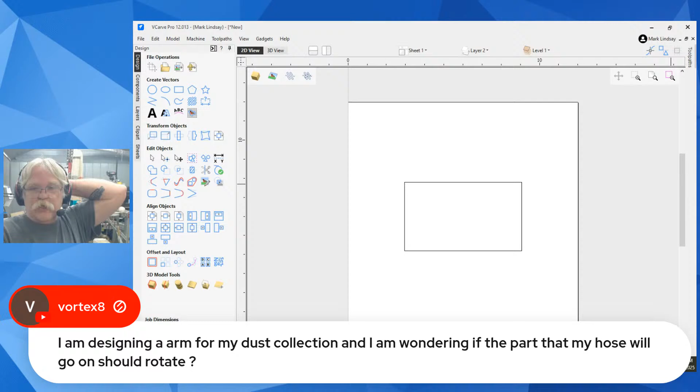Okay, we have one more question I'm going to try to get to here. David, Vortex 8 says: I'm designing an arm for my dust collection and I'm wondering if the part that my hose will go on should rotate. He later clarified, like a seesaw.

That is 100%... whoops, removed the wrong thing. That is 100% up to you, David. I have not found the perfect answer to that.

So my answer so far, David, is I've got mine tied up with orange mason's line. I just put a screw in the ceiling. I'm running steel duct pipe, galvanized duct pipe, up to a certain point, and then my flex hose attaches at the end. It is just tied to the ceiling, and it moves enough to follow the gantry around. I need to shorten up my hose - I have too much flex hose hanging off of that. And that's about it.

I have seen lots of neat solutions for that. I've seen arms mounted to the wall that pivot, and that's fine if you have the wall space. That wasn't an option because from the back of my machine to the wall is 2 feet, and I need to be able to get back there, so I can't have something mounted to the wall that would prevent me from getting all the way around the machine.